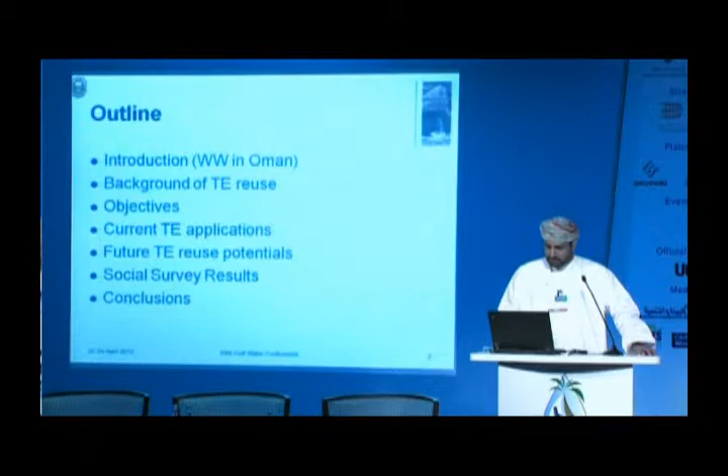In Oman generally, like in other countries in the region and the world, you have, according to availability, different types of treatment. It varies from no treatment, where you leave it to biological treatment in certain landfills, to primary, secondary, and tertiary well-planned treatment, which we have in different places. I'm giving those major cities as examples.

The disposal of the treated effluents or final effluents from those places varies also. We have different applications, some specific for Oman, maybe others used in the region, but there are also international applications for this.

The widest application is landscape irrigation. We also have a special one, which is injecting the treated effluents into the groundwater. Maybe that will happen more as we have long coasts in Oman, and we may need to fight salinity, which can be one option for doing that.

There are also some industrial applications for cooling and processing. The wastewater has also another side.

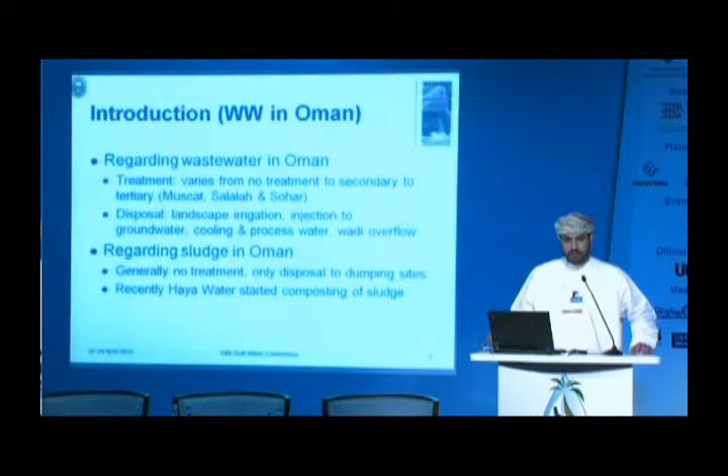After you treat the water, you also have sludge, which is the solid remaining. Generally in Oman currently, most plants just take that watered sludge to landfills, while now in Haya Water, they are building a composting plant and actually selling this sludge as fertilizer.

At the beginning, they had some trouble selling it, but later some farmers started to appreciate the sizes of some vegetables and got encouraged about using it. Also in Salalah, I think they're building a thermal plant to again make use of this sludge.

This is a typical layout - the tertiary treatment plant layout used in Oman, which starts from the primary holding tank, then biological treatment, then filters and chlorination, and then the water is ready for reuse applications. At the bottom you have the wasted sludge.

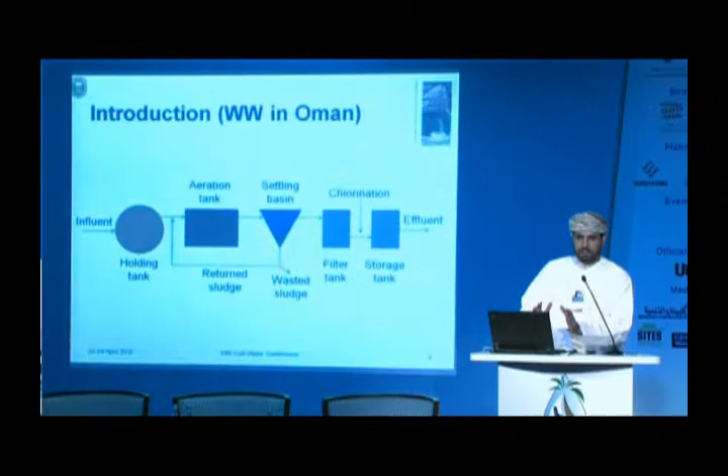In large plants, they are now planning to have treatment of the sludge. Although in Muscat they have a central treatment plant - instead of having it in each plant, they are taking everything to a composting plant. So there is also a transportation issue with it.

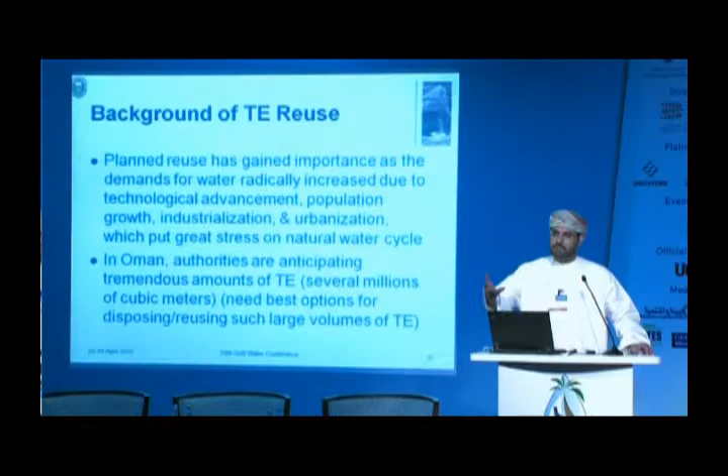Treated effluent reuse nowadays, with huge developments in major cities, population growth, advanced technologies, and the new need for safer water and better utilization, is all demanding more water. Again, this is putting our natural resources under huge stress.

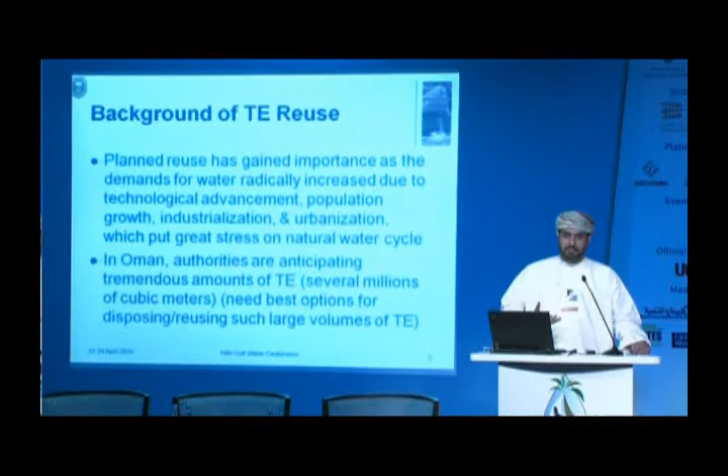In Oman, the authorities are anticipating that tremendous amounts of treated effluents will be produced. This might be a good thing, or it can also be a bad thing, in terms of huge amounts of water that you need to handle and dispose of, or you can make use of it.

So we need to find some best options for disposing and reusing such a large volume of water. The issue is maybe one solution is not always possible - you need multiple thinking. One of our speakers, the keynote speaker this morning, mentioned some drivers. I don't think I need to go through them, but again, one of the issues is the lack of adequate local supply for the water, and this is a major issue.

If you have this water to replace the need for that water, then why not use it if it's meeting our standard? And the other benefit is, if you do that, you will conserve the natural water. You can make use of it in a better way, and other applications as well. However, there are also regulations that we have to meet, and these are sometimes obstacles. You need to have an integrated system to apply and go through them.

So the objective of this is to present the current status of the treatment system in Oman and the reuse applications, what we are having right now. And then we can move forward to see the options that we can see.

We have, for Haya Water, we suggested 6 options. We will study them for the company. Of course, we're doing field sampling, we're doing also modeling for them. But part of it was doing the social survey to see the acceptance of people to such options.

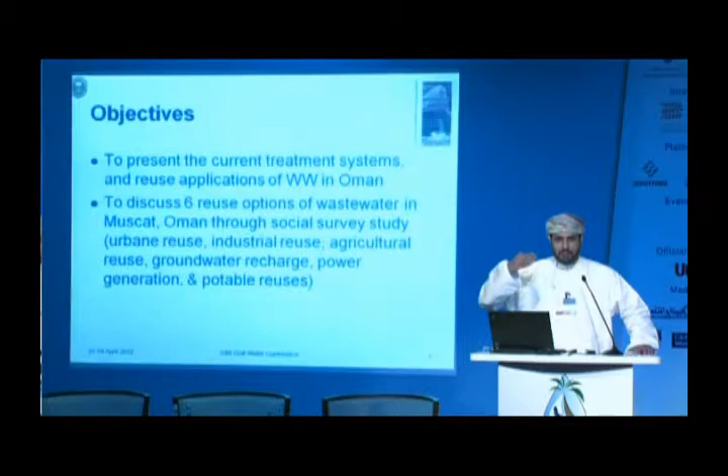And the options are actually urban reuse for different applications, industrial reuse because we have industrial areas around Muscat, agricultural reuse if we can do some of this in Muscat or in the vicinity of Muscat, groundwater recharge, we'll see that. And we also thought that we should go a little bit beyond that to see, can we also generate some power from this? Can we actually use it for potable reuse, either indirect or direct?

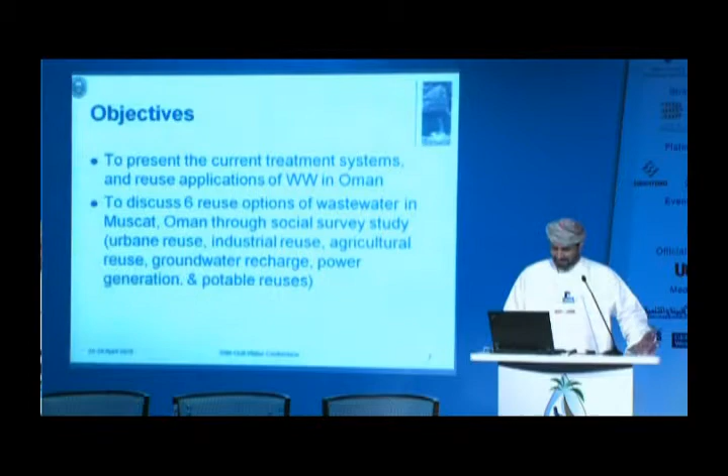The future application, I believe personally that we cannot use only one solution. I think we should also try to mix the solutions to meet the variable demand all over the year. Because if you choose agriculture, there is only demand in certain seasons, and then you will have excess water, so you have to have a solution for the excess water at that time.

And also you have to see different customers in order to promote the use of this treated effluent, also psychologically and socially among people, so that everybody appreciates this water as a water resource rather than a wastewater. Again, I think the word treated wastewater should be changed. It should be treated effluent, or reused effluent, so that we try to hide this psychological barrier.

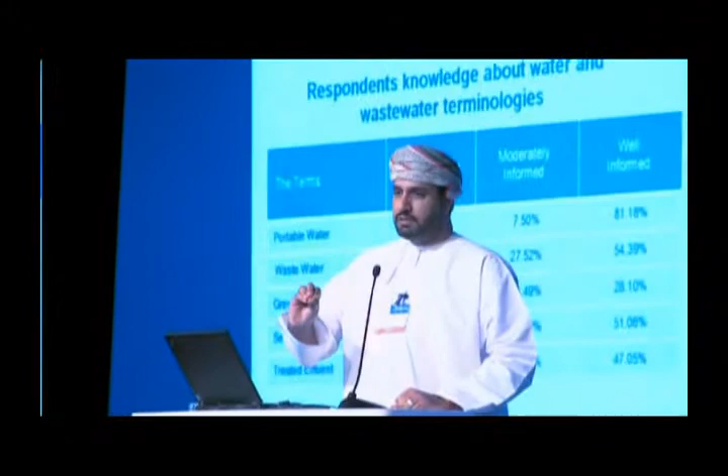Then we asked them about general terms in treatment of water and wastewater. For example, do you know what is potable water, what is wastewater, what is gray water, what is sewage recycled water, what is treated effluent? And again, the results were variable. For example, when you come up with new terminology like gray water, half of the people surveyed don't know anything about it.

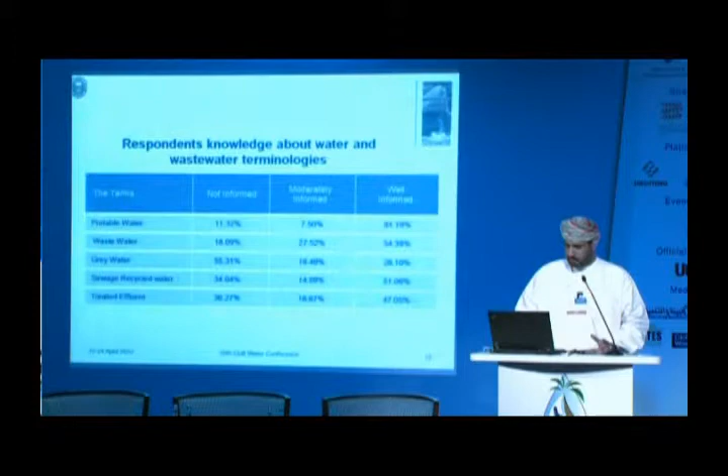And also, regarding treated effluents, a third of the surveyed people didn't know anything about it. Then we looked at their perspective on their individual impact on policy making. We asked them, do you think you can make a change? Does your opinion matter? About 40% of them said, I don't think it will matter, so I don't need to worry about it.

Again, there is room for public awareness, and I think it's the opposite. Actually, if you talk and send your message, there are always people who will listen to you. Only 25% or 26% think they have some strong impact on changing these policies.

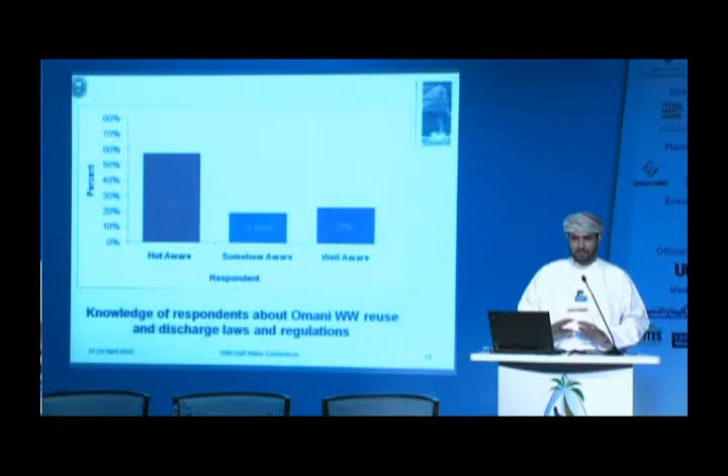We asked them, do you know that there are Omani regulations for water and wastewater? More than 57% don't know that these exist. I believe if you go to normal people, that's where the awareness is actually missing.

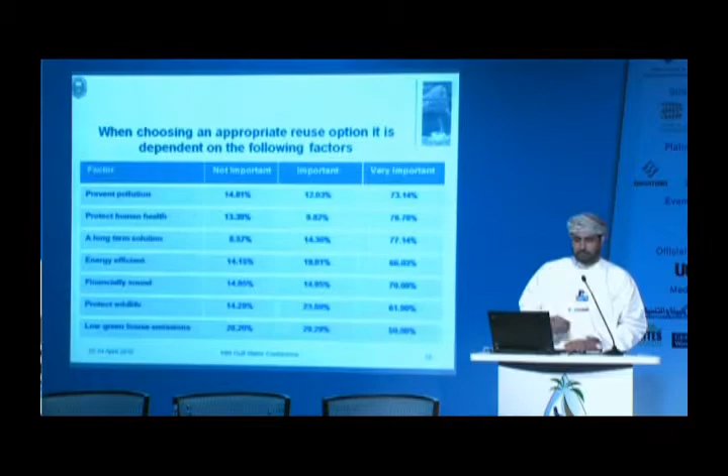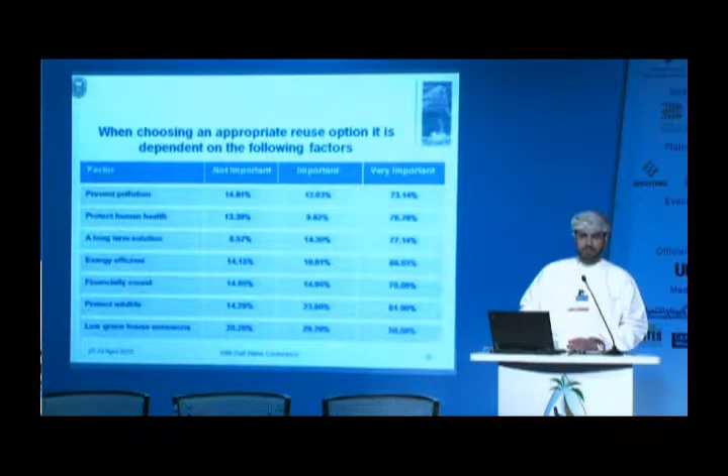Then, when choosing an appropriate reuse, we started asking them about the reuse application. Would you support it or not? We asked them to rank it in terms of whether the reuse will prevent pollution of the sea or groundwater. Would you support that? Most of them said yes, we will support it. If it will protect human health, yes, we will support that. So again, everything is positive when you're reusing it.

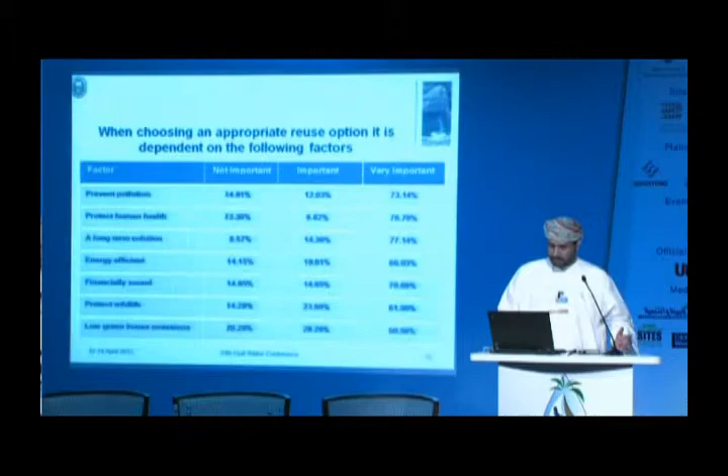Once they know that there are benefits coming from this application, we asked them to rank the reuse applications, like irrigating golf courses, landscape areas, public parks, groundwater recharge, and all those. Again, the majority of people are with these options. They have no problem with it as long as it protects public health and has all these benefits.

We asked them specifically about this: do you trust the wastewater treatment companies? A few people said we don't trust them. Most of them have limited trust because they think there is more need to work on these sensitive issues.

Then we asked them how they think they can communicate well with these authorities through different media, from articles to emails, mails, or presentations. Some of them prefer things they can read or see, like newspapers and TVs. They don't want you to come directly to their houses, but if you can improve these on public media, they would be interested.

In conclusion, currently the treated effluent resulting from major cities in Oman is used mainly for landscape irrigation. However, we need to change this because of the increase in huge amounts of treated effluents. More than 30% of respondents have no knowledge about wastewater, so we need to do more in terms of awareness and education. The public has no general understanding about the differences between water and wastewater terminology.

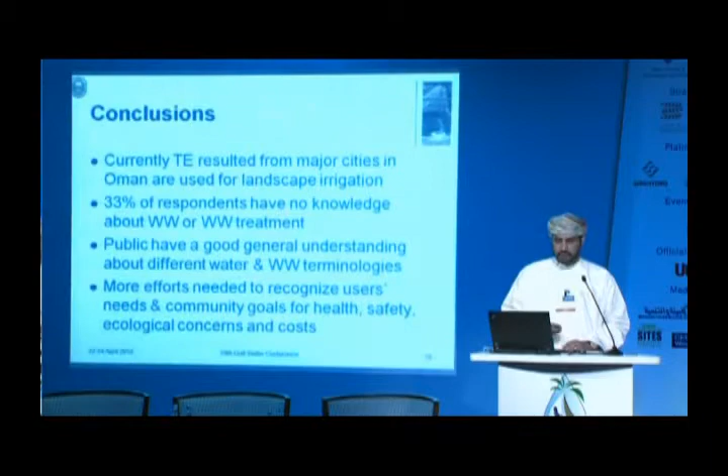So they are confused about whether this is water or wastewater treatment. This is one of the issues; again, awareness is needed. More efforts are needed to recognize users' needs and communities' goals for health, safety, ecological concerns, and costs. You need to go to them in order to convince them, and they will support it, definitely. There is a knowledge gap that might affect public perspective about wastewater treatment and reuse. If you don't close this gap, there will always be a problem in going forward without their support.

Respondents are very positive about supporting potential reuses, because once they know these are for the general benefit of society, the environment, and nature, they are with it. The public might be reluctant to accept any kind of reuse directly or indirectly related to food and drinking. If you ask, do you think we can treat it and bring it to the water supply, most of them say no. While they would accept it going to the groundwater, and then the groundwater being treated.

Finally, I would like to acknowledge the support from Haya Water for this, the ministries, the regional municipality and water resources, and the environment and climate affairs for all the service and support they have given us for getting any data. Salalah sanitary drainage service were also very keen in giving us information about the groundwater issues there. And of course, our technical staff and postgraduate students who are always there to support. Thank you very much.

Thank you, Dr. Mahad, and we really trust all the waste treatment company.

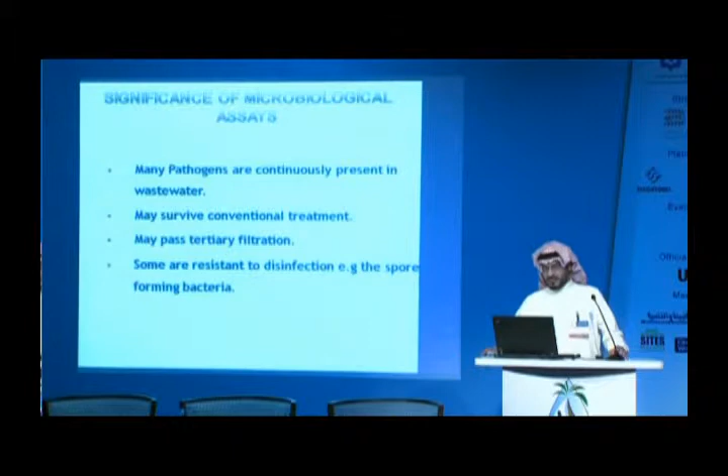The significance of microbiological assays is very clear, for many reasons. Many pathogens are continuously present in wastewater. These pathogens may survive conventional treatment, may pass tertiary filtration, and some are resistant to disinfection, for example spore-forming bacteria.

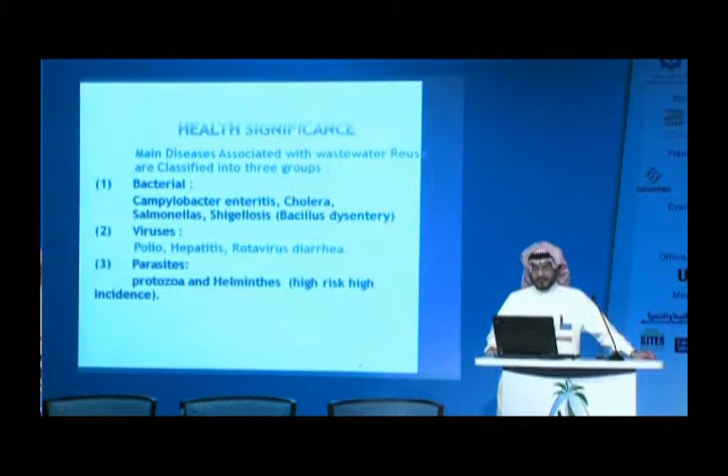To review, the diseases associated with treated wastewater can be classified into bacterial, for example cholera; viruses, for example polio, hepatitis, which is endemic in our country or region; and the third class is parasites, the helminths, which are designated as high risk, high incidence.

To summarize, bacterial diseases associated with water and wastewater include typhoid, shigellosis, salmonellosis; viral diseases include rotavirus, polio, hepatitis; and parasites include Giardia, Cryptosporidium, helminths, and so on.

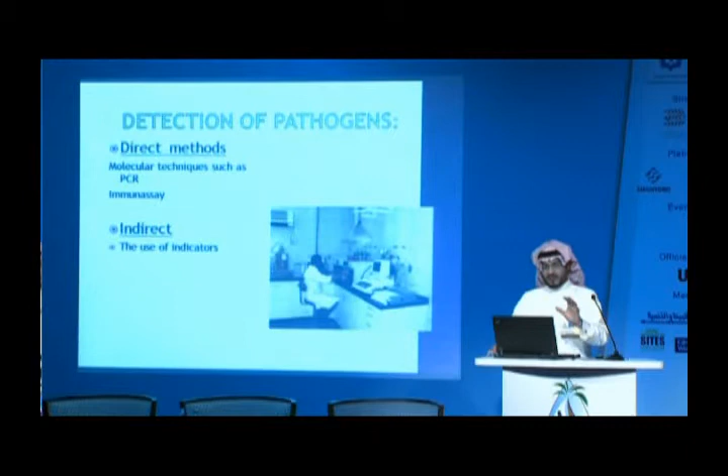So detection is very important, a shield against the losses caused by these diseases. We have direct methods and indirect methods. Direct methods include PCR and immunoassay, but these are very expensive and need very skilled persons. The indirect method uses so-called indicator organisms.

The ideal indicator should have several features: present whenever pathogens are present, more resistant than the pathogen itself, should correlate with the amount of pollution, easily detected, harmless so that in the laboratory there are no outbreaks or danger from this organism, constant characteristics, and absent from unpolluted water.

The ideal bacterial indicators used are fecal coliform, fecal streptococci, and Clostridium perfringens, but several studies showed no association with viral presence or parasites, which are more resistant than bacterial indicators.

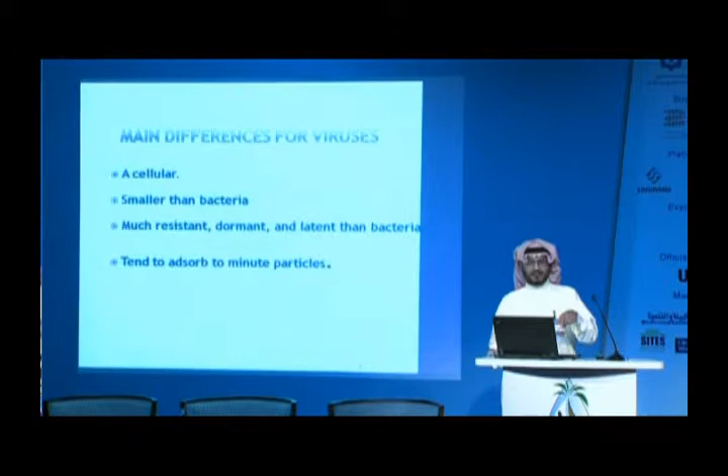So what we can do is care for the viruses, because viruses are different from bacteria. Viruses are acellular, they are protein, smaller than bacteria. Some viruses even infect bacteria themselves, are much more resistant, and could be dormant and latent longer than bacteria. Also, viruses tend to adsorb to very minute particles, nanoparticles.

What we've done is study the resistance of 5 microbial indicators to environmental stresses using sand filter and UVR. Correlations were also studied. The 5 selected organisms were fecal coliform, widely used in water and wastewater indication, fecal streptococci, Clostridium perfringens, which is anaerobic bacteria, DNA coliphage, and RNA coliphage.

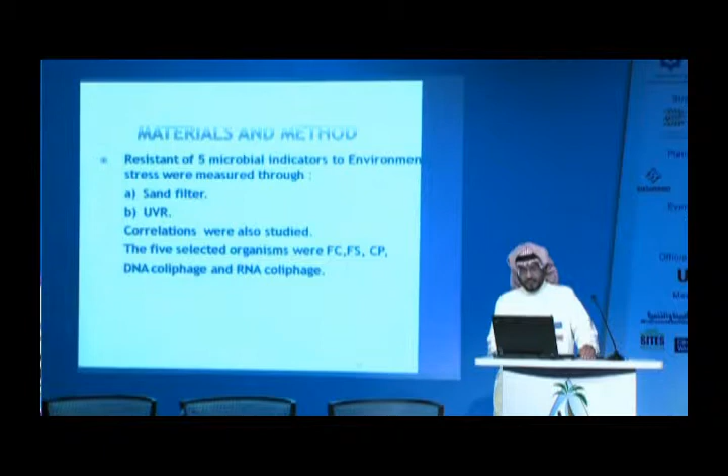Our results showed the number of the 5 indicator organisms in wastewater was fecal coliform, followed by fecal streptococci, then DNA coliphage, then RNA coliphage, followed by Clostridium bacteria, for both influent and effluent.

Again, the resistance to sand filter decreased in the order of Clostridia, more than RNA, more than DNA phage, more than fecal coliform, which is widely used, and the least resistant was fecal streptococci.

But for UVR, the order was Clostridium perfringens the highest, followed by RNA, followed by DNA, followed by fecal coliform, and the least was fecal streptococci.

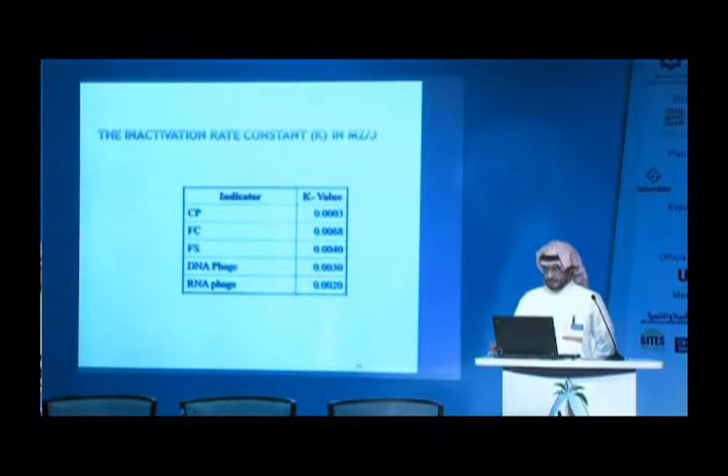The conclusions: the study suggests the use of RNA coliphage as a primary indicator. The investigation proposes a limit of 20 PFU (plaque forming unit) per 100 ml, and 50 PFU per 100 ml, as a new guideline for unrestricted and restricted reuse, respectively. The test is simple, safe, and inexpensive, and results can be obtained in less than 18 hours.

These two indicators, if used in conjunction with turbidity, I think form a sufficient indicator system which can be obtained in a few hours. Thank you very much.